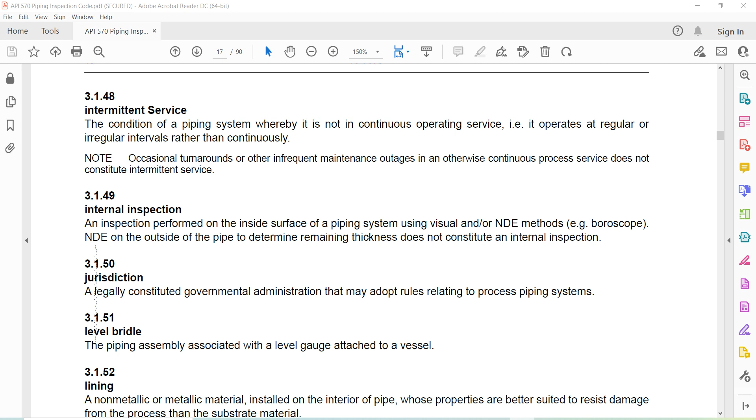Internal inspection: an inspection performed on the inside surface of a piping system using visual or other NDE methods. Borescope NDE on the outside of the pipe to determine remaining thickness does not constitute internal inspection.

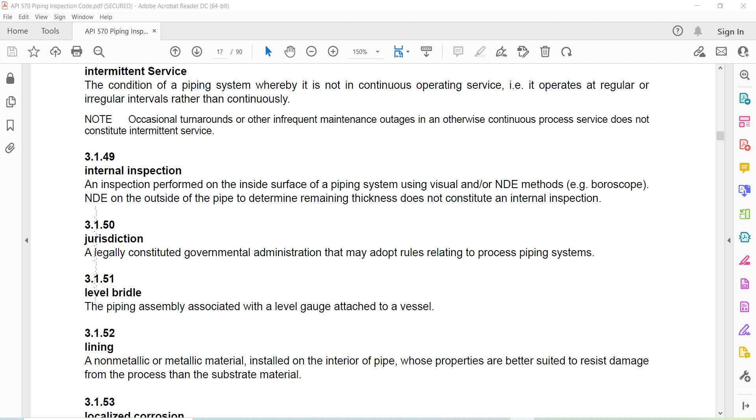Jurisdiction: a legally constituted governmental administration that may adopt rules relating to process piping systems.

Level bridle: the piping assembly associated with a level gauge attached to a vessel.

Lining: non-metallic or metallic material installed on the interior of pipe whose properties are better suited to resist damage from the process than the substrate materials.

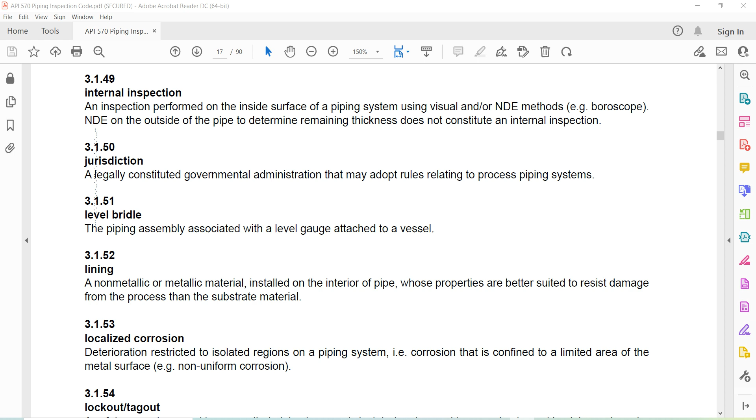Localized corrosion: deterioration restricted to isolated regions of a piping system. Corrosion that is confined to a limited area of the metal surface, e.g., non-uniform corrosion.

Lockout tagout: a safety procedure used to ensure that piping is properly isolated and cannot be energized or put back in service prior to the completion of inspection, maintenance, or servicing work.

Major repairs: welding repairs that involve removal and replacement of large sections of piping systems.

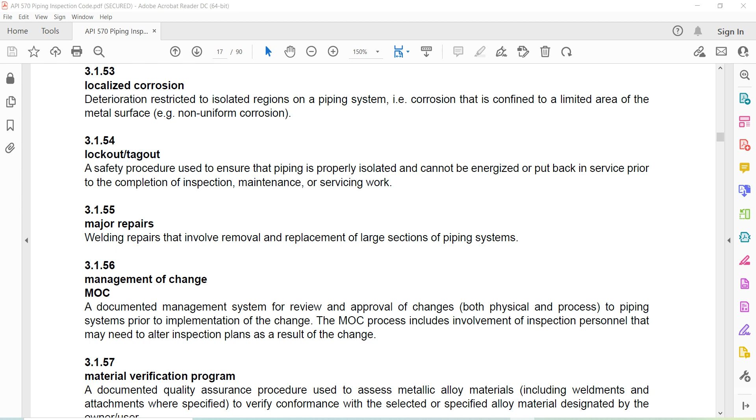Management of change, MOC: a documented management system for review and approval of changes, both physical and process, to piping systems prior to implementation of the change. MOC processes include involvement of inspection personnel who may need to alter inspection plans as a result of the change.

Material verification program: a documented quality assurance procedure used to assess metallic alloy materials, including weldments and attachments where specified, to verify conformance with the selected or specified alloy material designated by the owner-user. The program may include a description of alloy material testing, physical component markings, and program record keeping.

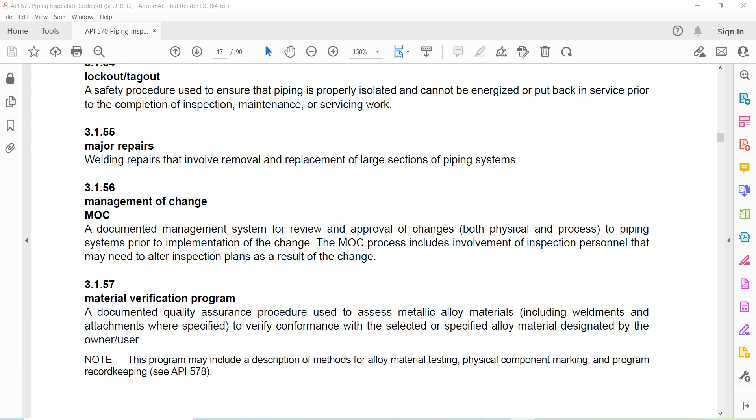Maximum allowable working pressure (MAWP): the maximum internal pressure permitted in the piping system for continued operation at the most severe condition of coincident internal or external pressure and temperature, minimum or maximum, expected during service. It is the same as the design pressure as defined in ASME B31.3 and other code sections, and is subject to the same rules relating to allowances for variations of pressure or temperature or both. If the piping system is being re-rated, the new MAWP shall be established.

Minimum alert thickness: a thickness greater than the minimum required thickness that provides early warning from which future service life of the piping is managed through inspection and remaining life assessment.

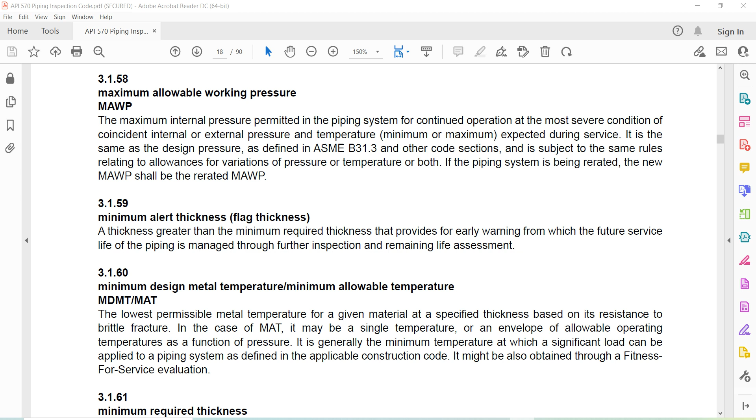Minimum design metal temperature (MDMT), minimum allowable temperature: the lowest permissible metal temperature for a given material at a specified thickness based on its resistance to brittle fracture. In the case of MAT, it may be a single temperature or an envelope of allowable operating temperatures as a function of pressure. It is generally the minimum temperature at which a significant load can be applied to the piping system as defined in the applicable construction code. It might also be obtained through a fitness-for-service evaluation.

Minimum required thickness, Tmin: the thickness, without corrosion allowance, for each component of a piping system based on the appropriate design code calculations and code allowable stress that consider pressure, mechanical, and structural loads. Alternatively, minimum required thickness can be reassessed using fitness-for-service analysis in accordance with API 579-1/ASME FFS-1.

Mixing points are locations in a process piping system where two or more streams meet. The difference in streams may be composition, temperature, or any other parameter that might cause deterioration and may require additional design considerations, operating limits, inspection, or process monitoring.

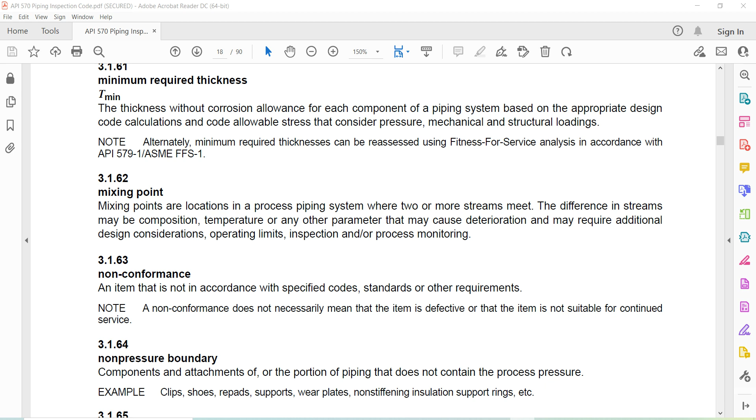Nonconformance: an item that is not in accordance with specified codes, standards, or other requirements. A nonconformance does not necessarily mean the item is defective or that it is not suitable for continued service.

Non-pressure boundary: components and attachments of, or the portion of the piping that does not contain the process pressure. Examples include clips, shoes, repad supports, wear plates, non-stiffening insulation support rings, etc.

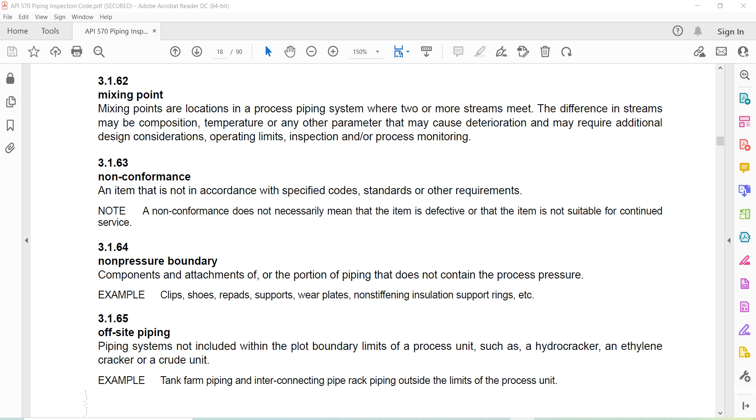Off-site piping: piping systems not included within the plot boundary limits of a process unit, such as a hydrocracker, an ethylene cracker, or a crude unit. This includes tank farm piping and interconnected piping rack piping outside the limits of the process unit.

On-site piping: piping systems included within the plot limit of process units such as a hydrocracker, an ethylene cracker, or a crude unit.

On-stream piping: piping systems that have not been isolated and decontaminated, still connected to an in-service process equipment. Piping systems that are on-stream can be full of product during normal processing or empty, or may still have residual process fluids in them and not be currently part of the process system. Temporarily valved out of service.

On-stream inspection: an inspection performed from the outside of the piping system while they are on-stream, using NDE procedures to establish the suitability of the pressure boundary for continued operation.

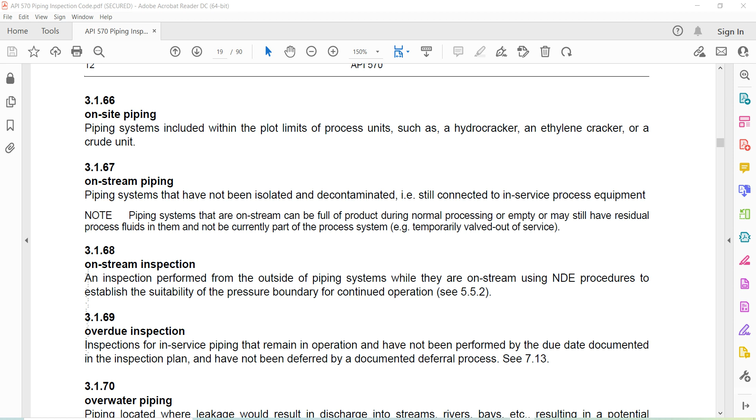Overdue inspection: inspections for in-service piping that remain in operation and have not been performed by the due date documented in the inspection plan, and have not been deferred by a documented deferral process.

Overwater piping: located where leakage would result in discharge into streams, rivers, bays, etc., resulting in a potential environmental incident.

Owner user: the organization that exercises control over the operation, engineering, inspection, repair, alteration, pressure testing, and rating of the piping system. Owner user inspector: an authorized inspector employed by an owner user who has qualified by examination under the provisions of Section 4 and Annex A.

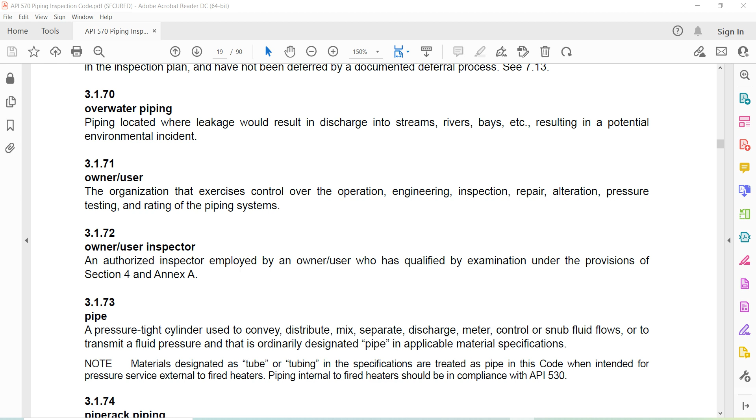Pipe: a pressure tight cylinder used to convey, distribute, mix, separate, discharge, meter, control, or snub fluid flows, or to transmit a fluid pressure, that is ordinarily designated pipe in applicable material specifications. Materials used as tube or tubing in the specifications are treated as pipe in the code when intended for pressure service external to fired heaters. Pipe internal to fired heaters should be in compliance with API 530.

Pipe rack piping: process piping that is supported by consecutive stanchions or sleepers, including straddle racks and extensions.

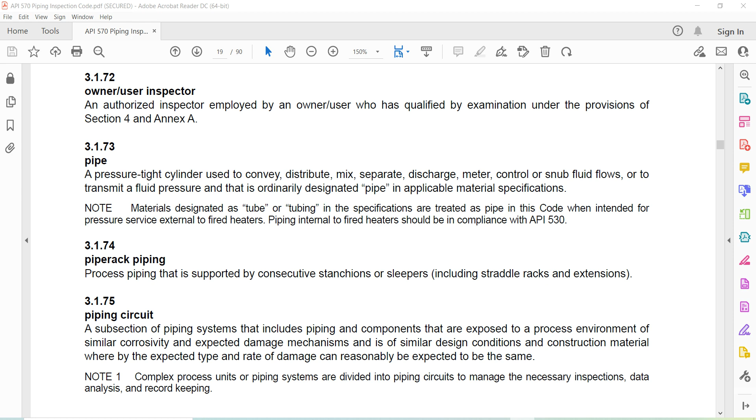Piping circuit: a subsection of piping systems that include piping and components that are exposed to process environments of similar corrosivity and expected damage mechanisms, of similar design conditions and construction material, whereby the expected type and rate of damage can be reasonably expected to be the same. Complex process units and piping systems are divided into piping circuits to manage the necessary inspection, data analysis, and record keeping. When establishing the boundary of a particular piping circuit, it may be sized to provide a practical package for record keeping and performing field inspection.

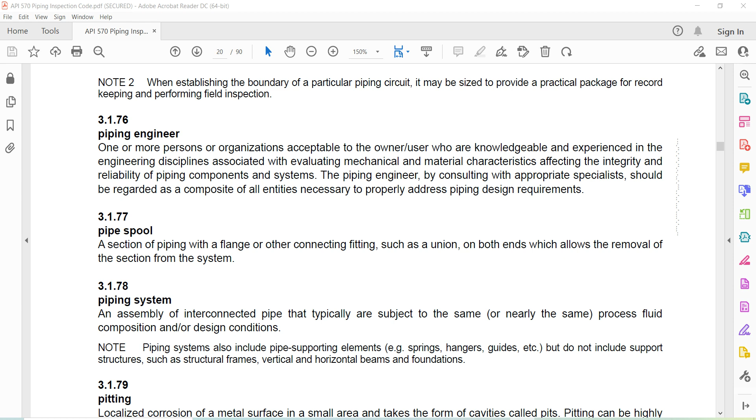Piping engineer: one or more persons or organizations acceptable to the owner user who are knowledgeable and experienced in the engineering disciplines associated with evaluating mechanical and material characteristics affecting the integrity and reliability of piping components and systems. The piping engineer, by consulting with appropriate specialists, should be regarded as a composite of all entities necessary to properly address piping design requirements.

Pipe spool: a section of pipe with a flange or other connecting fittings, such as unions, on both ends, which allows the removal of the section from the system.

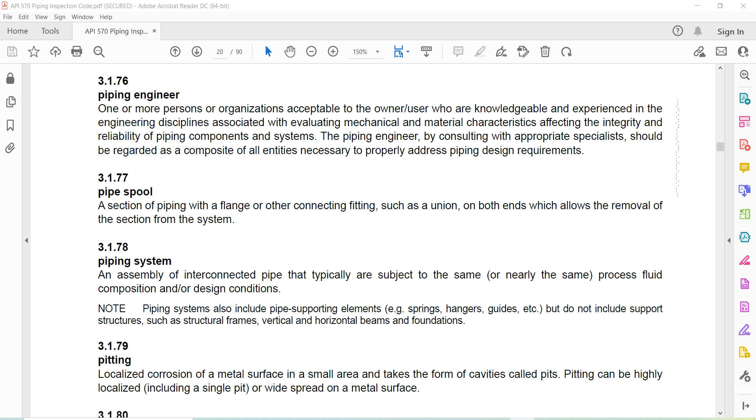Piping system: an assembly of interconnected pipe that typically are subject to the same or nearly the same process fluid composition or design conditions. Piping systems also include pipe support elements such as springs, hangers, guides, etc., but do not include support structures such as structural frames, vertical and horizontal beams, and foundations.

Pitting: localized corrosion of a metal surface in a small area that takes the form of cavities called pits. Pitting can be highly localized, including a single pit, or widespread on a metal surface.

Positive material identification: any physical evaluation or test of a material to confirm that material which has been or will be placed in service is consistent with the selected or specified alloy material designated by the owner user. These evaluations or tests can provide qualitative or quantitative information sufficient to verify the nominal alloy composition.

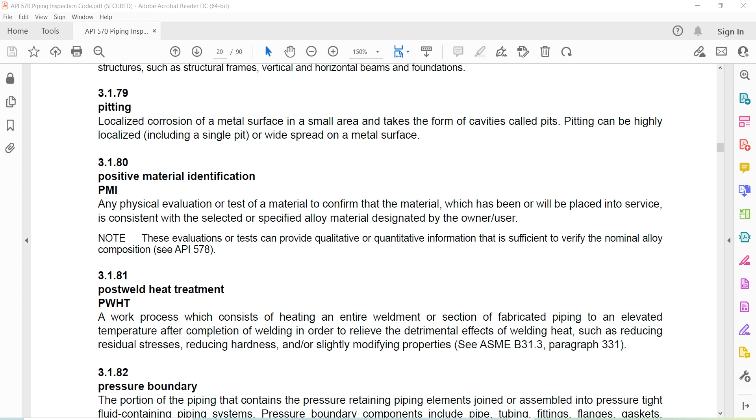Post-weld heat treatment: a work process which consists of heating an entire weldment or section of fabricated piping to an elevated temperature after completion of welding, in order to relieve the detrimental effects of welding heat, such as reducing residual stress, reducing hardness, or slightly modifying properties. ASME B31.3, paragraph 331.

Pressure boundary: the portion of piping that contains the pressure-retaining piping elements, joined or assembled into a pressure-tight fluid-containing piping system. Pressure boundary components include pipe, tubing, fitting, flanges, gaskets, bolting, valves, and other devices such as expansion joints and flexible joints. Also see the non-pressure boundary definition.

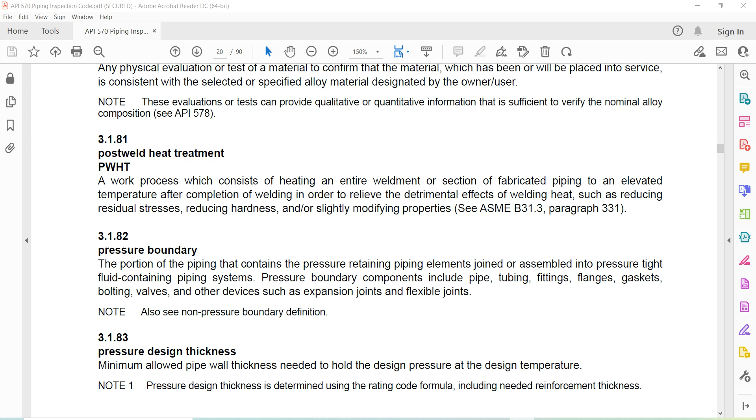Pressure design thickness: minimum allowable pipe wall thickness needed to hold design pressure at design temperature. Pressure design thickness is determined by rating code formula, including a needed reinforcement thickness.

Note 2. Pressure design thickness does not include thickness for structural loads, corrosion allowance, or mill tolerance, and therefore should not be used as the sole determinant of structural integrity for typical process piping.

Primary process piping: process piping in normal active service that cannot be valved off, or if it were valved off, would significantly affect unit operability. Primary process piping typically does not include small bore or auxiliary process piping. See also secondary process piping.

Procedures: a document that specifies or describes how an activity is to be performed on a piping system, often a step-by-step description—temporary repair procedures, external inspection procedures, hot tap procedures, NDE procedures, etc. A procedure may include methods to be employed, equipment or materials to be used, qualifications of personnel involved, and sequence of work.

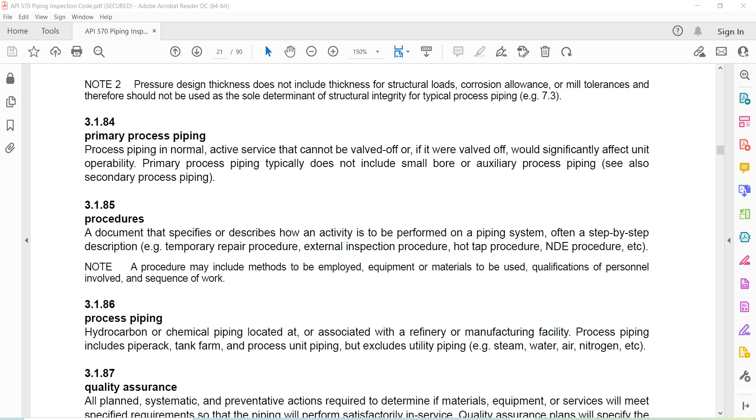Process piping: hydrocarbon or chemical piping located or associated with a refinery or manufacturing facility. Process piping includes pipe rack, tank farm, and process unit piping, but excludes utility piping, which would be steam, water, air, nitrogen, etc.

Quality assurance: all planned, systematic, and preventative actions required to determine if materials, equipment, or service will meet specified requirements so that the piping will perform satisfactorily in service. Quality assurance plans will specify the necessary quality control activities and examinations. The contents of a quality assurance inspection management system for piping systems are outlined in 4.3.1.

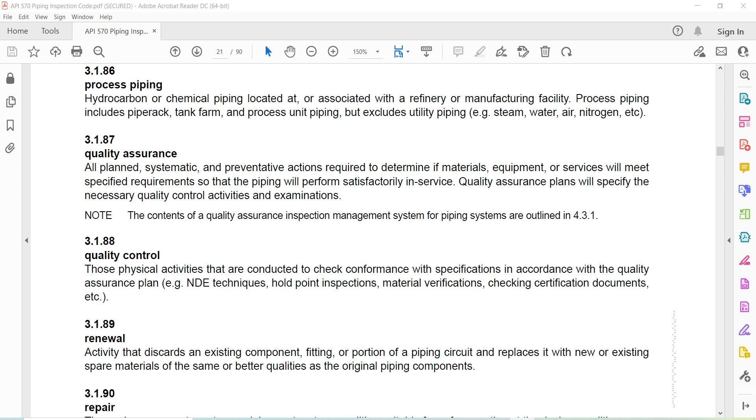Quality control: those physical activities that are conducted to check conformance with specifications in accordance with the quality assurance plan—NDE techniques, hold points, material verifications, checking certification documents, etc.

Renewal: activity that discards an existing component, fitting, or portion of a piping circuit and replaces it with new or existing spare materials of the same or better quality as the original piping components.

Repair: the work necessary to restore a piping system's condition suitable for safe operation at the design conditions. If work or any restorative changes results in a change of design temperature or pressure, the requirements of re-rating also shall be satisfied. Any welding, cutting, and grinding operation on a pressure-containing piping component not specifically considered an alteration is considered a repair. Repairs can be temporary or permanent.

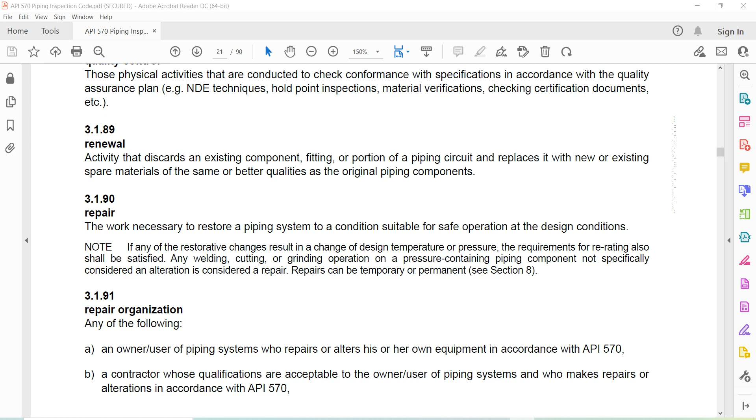Repair organization, any of the following: an owner or user of a piping system who repairs or alters his or her own equipment in accordance with API 570; a contractor whose qualifications are acceptable to the owner or user of the piping system, who makes repairs or alterations in accordance with API 570; or an organization that is authorized by, accepted to, or otherwise not prohibited by the jurisdiction, who makes repairs in accordance with API 570.

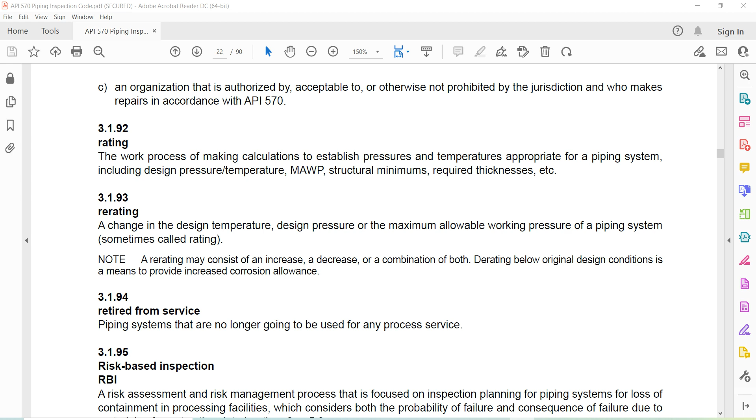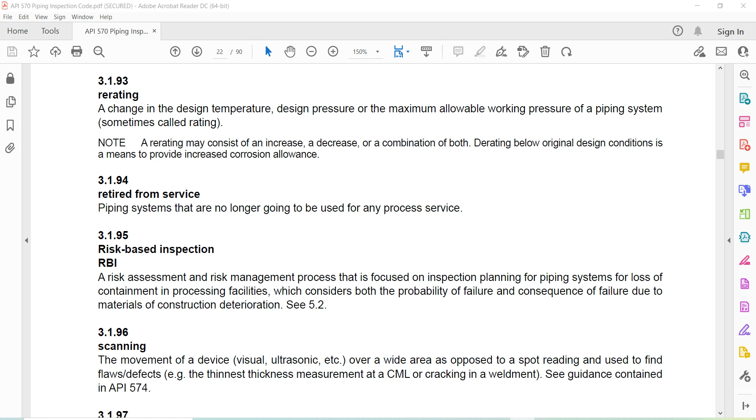Re-rating: a change in the design temperature, design pressure, or maximum allowable working pressure of a piping system, also called rating. A re-rating may consist of an increase, decrease, or combination of both. Derating below original design conditions is a means of providing increased corrosion allowance.

Retired from service: piping systems that are no longer going to be used for any process service.

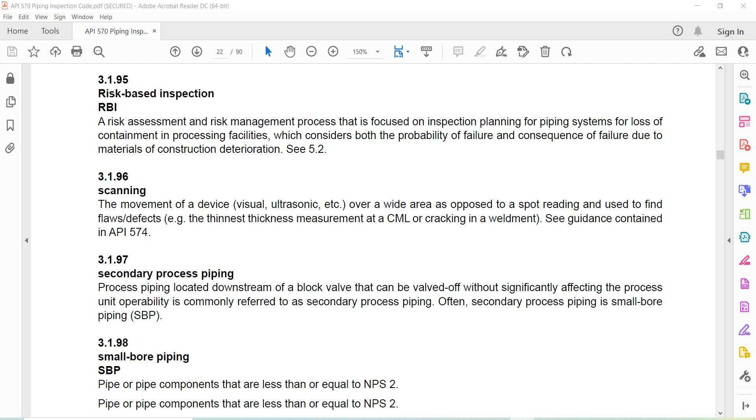Risk-based inspection: a risk assessment and risk management process that's focused on inspection planning for piping systems for loss of containment in process facilities, which considers both the probability of failure and the consequence of failure due to materials of construction deterioration. See 5.2.

Scanning: the movement of a device, visual or ultrasonic, over a wide area as opposed to a spot reading, used to find flaws or defects—the thinnest thickness measurement at a CML or cracking in a weldment. See guidance contained in API 574.

Secondary process piping: process piping located downstream of a block valve that can be valved off without significantly affecting the process unit operability is commonly referred to as secondary process piping. Often, secondary process piping is small bore piping.

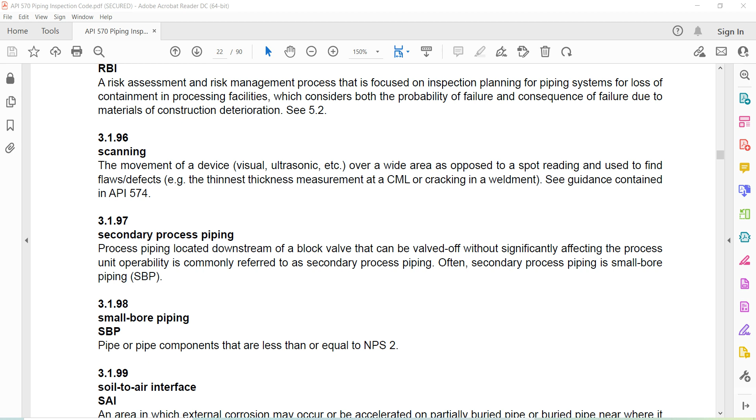Small bore piping: pipe or pipe components that are less than or equal to NPS 2.

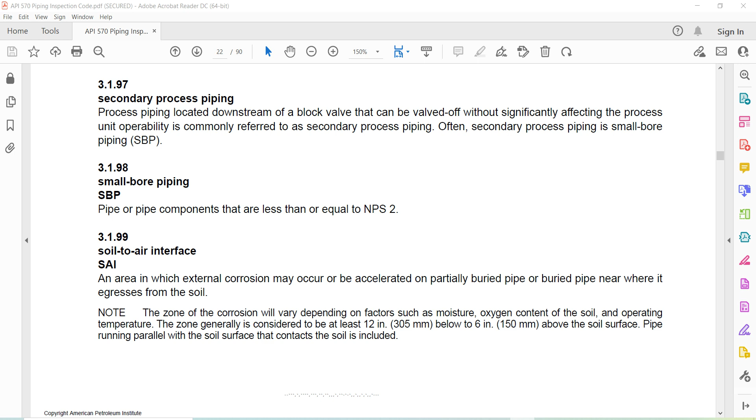Soil-to-air interface: an area in which external corrosion may occur or be accelerated on partially buried pipe, or pipe buried near where it egresses from soil. The zone of corrosion will vary depending on factors such as moisture, oxygen content of the soil, and operating temperature. The zone generally is considered to be at least 12 inches below to 6 inches above the soil surface. Pipe running parallel with the soil surface that contacts the soil is included.